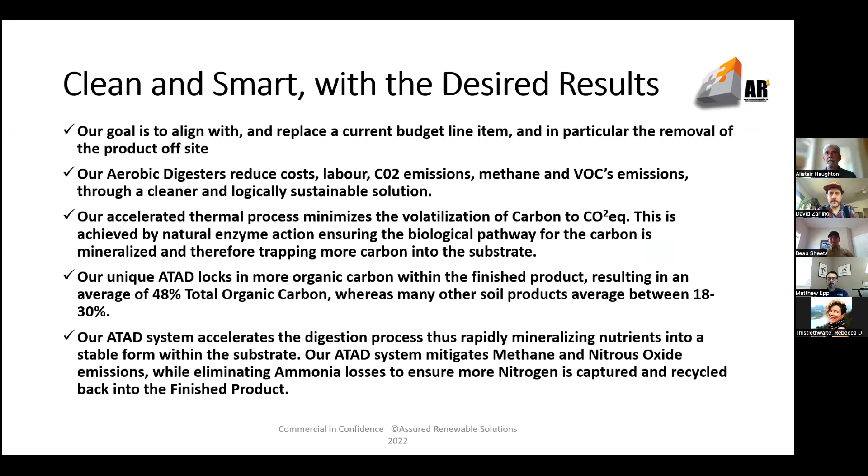It just, you load it and it's loaded through automatic source feed abilities. And then of course, you have this valuable product that comes out the end without you having to worry about groups having to come pick it up or take it to the landfill, etc. These are some of the advantages. Of course, it removes the issues when it comes to the pathogen load.

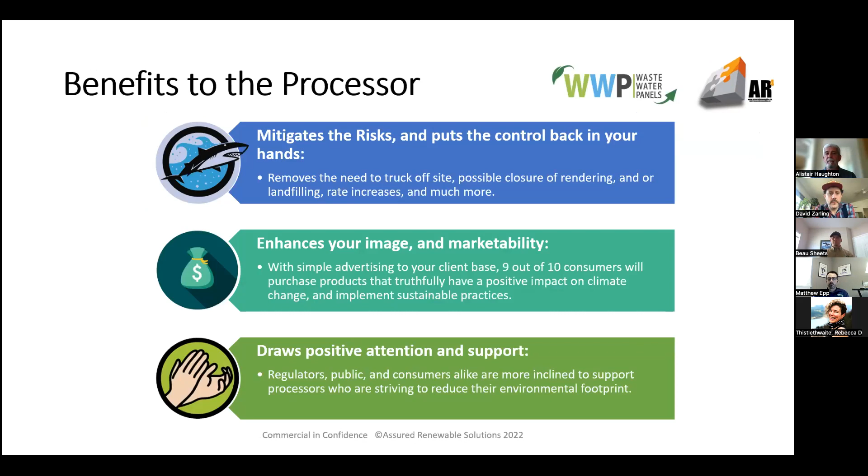One thing I will add there is that if interesting bugs are present, BSE or something of that nature, and it's detected, you at least have the ability then to segregate that waste stream from the balance of material, test it. You're able to hold it on site because it does not attract vermin or it won't rehydrate. So you're able to then test that material if, for instance, prions are present.

That material has been degraded and composted to the point where it actually will be accepted at landfill, because it's not going to cook off in a landfill and cause those other issues. And it can be safely disposed of.

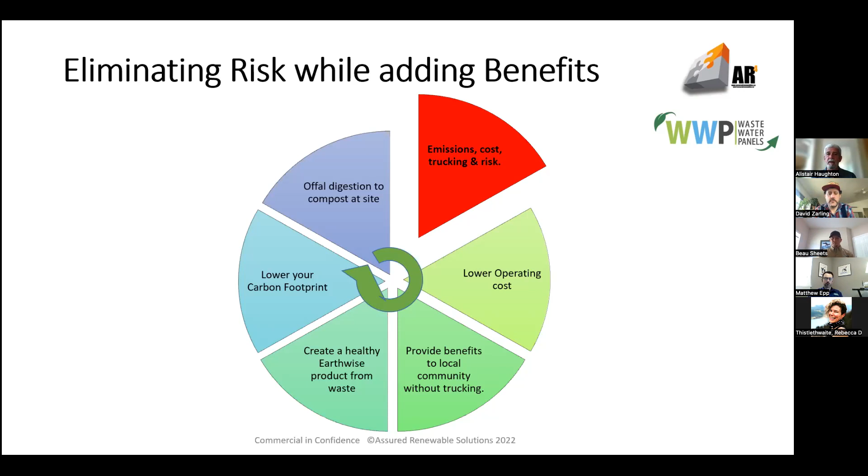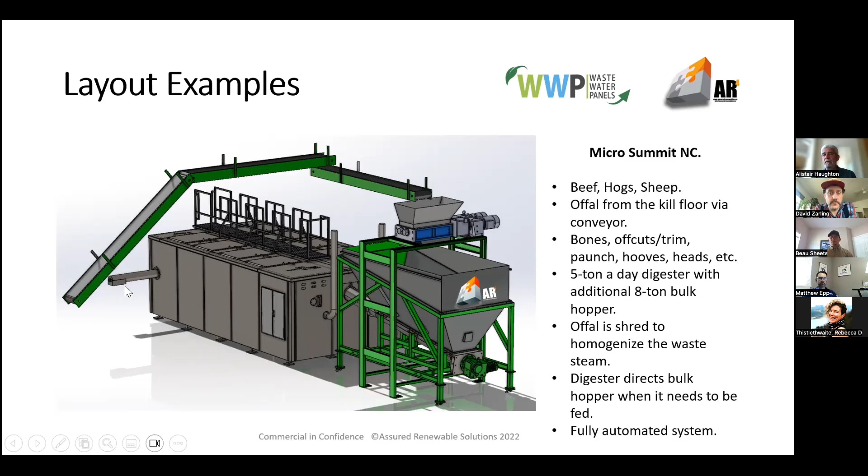Again, some frequently asked questions. This is going to be circulated, so you'll see it. This is another example, in Carolina, where it's an outflow system by conveyor from the plant. So offal right off the kill floor, straight up, straight into the shredder, into the hopper, out. And again, just showing you the ability to be able to design units and fit them into pretty tight spaces if necessary.

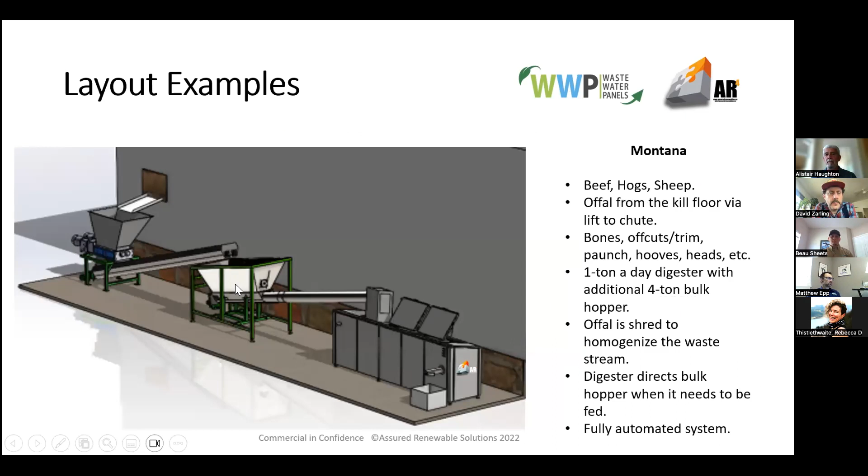This is another unit, in Montana. Again, straight off the kill floor, shredder, hopper, digester, output. Very straightforward. Just some of our clients.

So again, it comes down to a matter of being able to isolate the risk that is presented to the abattoirs themselves while increasing their productivity on the floor, because they're not having to put the labor into managing barrels. And if the guy doesn't decide to come pick the truck up one day, you're left with all that offal outside, everybody's upset, smells nasty. So this eliminates all of those issues while providing the upside benefits to both the abattoir itself and of course the community at large, and producing a high grade composted product that you can put to ground immediately.

We have the units in schools, as I mentioned before, military, abattoirs, hotels. The units are present in numerous applications outside of just offal and animal waste. And I'll leave it at that.

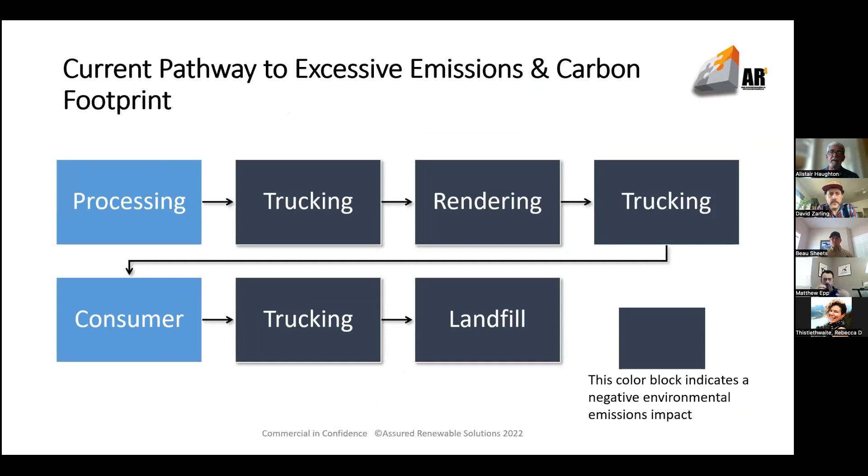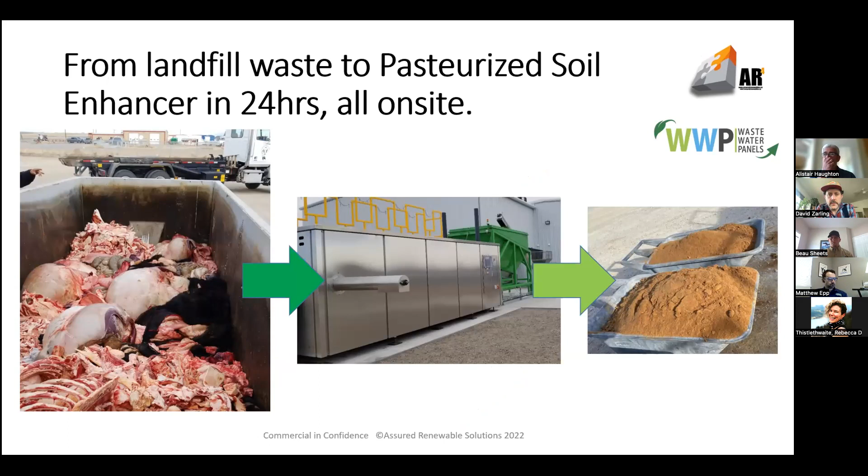So again, no additives. You don't have to pile enzymes in, you don't have to add a whole bunch of crazy things in there. One thing we do recommend, oddly enough, is rice hull pellets. We use those specifically to provide an additional boost to the output material, even though the output material is probably the best thing you can put to ground.

As a matter of fact, there's a number of studies, one done by the EPA and USDA in conjunction with two US universities, on the benefits of putting this material to ground. One study, done through the University of Minnesota, showed a 26% increase in wheat production. By adding a rice hull pellet, you're basically just adding silica, which is one of the most depleted products in the soil when you're farming, and of course silica is the baseline management system when it comes to growing plants.

Is this a batch or continuous process? It's continuous, you can add waste anytime. Can the finished product be used immediately? Yes. Maintenance-wise, again, very little is required, and we design it that way because, following the military pathway, you can't be sending guys in the field in the middle of bloody nowhere.

And we have systems as far away as Kwajalein in the Marshall Islands, all the way up to the north slope of Alaska, the highest points in the Yukon, Chile, Iceland - they're everywhere.

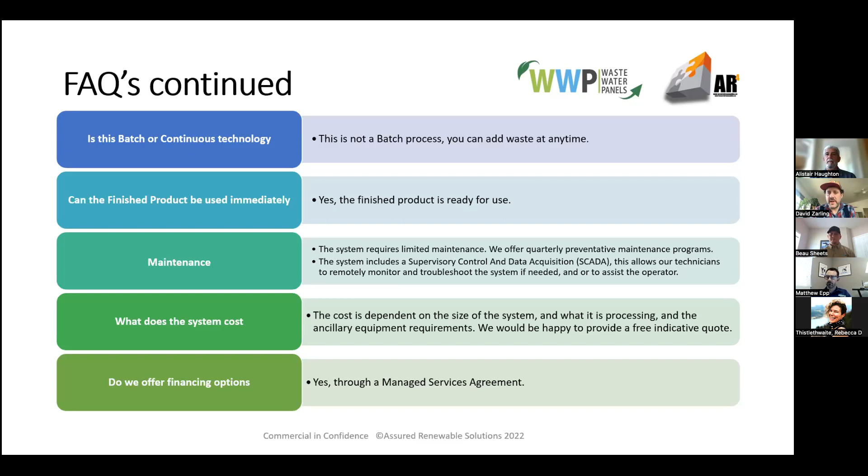This is a fantastic opportunity to talk about composting, because anybody in the composting industry knows that at parties we're not the popular ones. As soon as people ask what you do for a living and you start talking about composting and dead animal parts, they usually move on to the next person. Actually, it's how I knew my oldest daughter was dating some guy—we were at the school and he started talking to me about composting. It took me 60 seconds to realize something was funny there, and sure enough, they were interested in each other. We'll leave it at that.

So what I'm going to do today is talk about how composting works from a basic level, and then work that into our systems. I appreciated Alistair's presentation—he included a lot of really good base information, so I'm going to jump off of that.

So what is composting, and what is Ecodrum, and how does it work? Composting in its natural form is a natural biological breakdown of organic materials into stabilized nutrients. You're taking something that will essentially rot, and stabilizing those nutrients into soil enhancers that can be used for plant growth and food production.

All right, so this is what I was referring to. I'm throwing some real pictures up of some compost sites. So we kind of went through some of the basic elements of composting. I'm just going to reference the pictures here.

Alistair did a great job referencing the heat that the microbes produce, and you'll see some of the steam. Obviously we don't leave it open like this, but this is just when you open the loading door. These are some shots inside of loading doors and discharged compost, and the heat that's being given off. The microbes themselves put off a great amount of heat, the thermophilic activity that creates the temperatures.

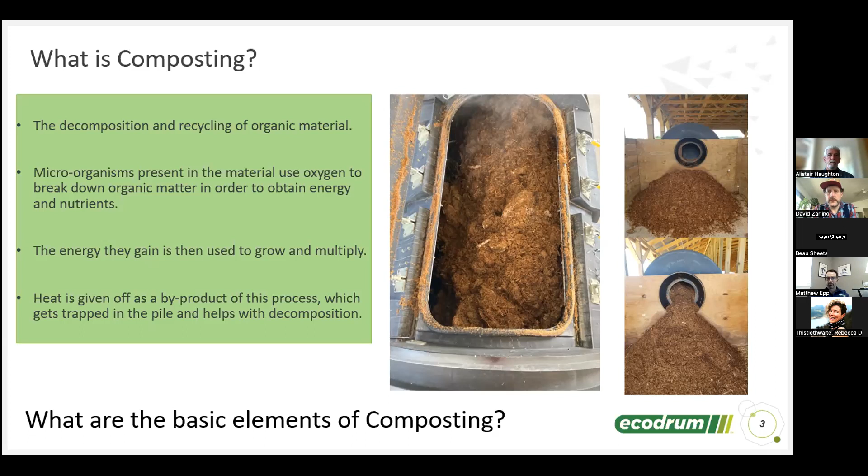So when we accelerate that process through forcing air into it and making sure the process is mixed correctly, you get those temperatures that create the pathogen-free compost product, per the EPA biosolid protocols.

So this is just the C:N ratios and the moisture and the oxygen that we referred to - feeding the microorganisms. In order for the composting process to occur, we need to create a suitable environment for the microorganisms to live and grow. So in addition to the nitrogen source, which is of course all the dead animal parts, the offal and the inedibles, correct carbon materials need to be present.

Alistair was referring to rice husks, which are a great option. We use everything from wood shavings, dried wood shavings, to peanut shells, to ground up corn cobs - any dry carbon source. In a site analysis, a discovery visit, we'll discuss what's available in your area for maximum ease and efficiency in your system.

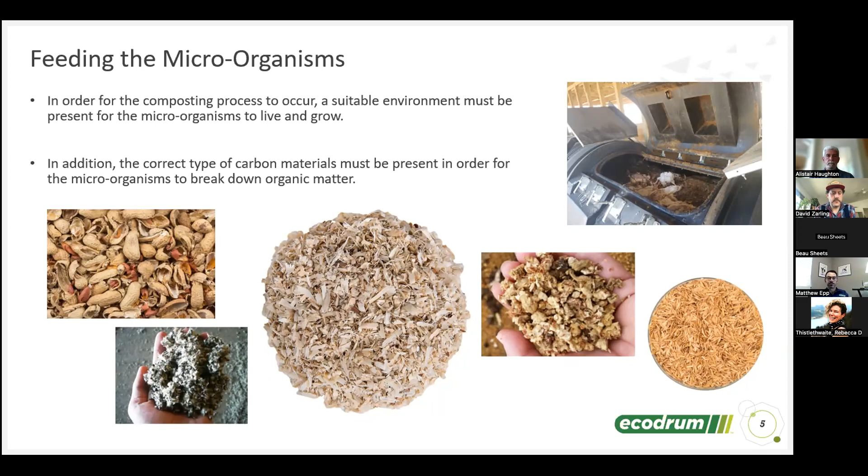I don't need to peel through this entire slide, but I noticed in the questionnaire that David put up that several of you do static pile composting. So this is just a little bit of a comparison slide between in-vessel composting versus static pile composting.

So we too are a continual feed system. You'll see in the pictures coming up, as the Ecodrum rotates, it moves the compost as it's doing its thing along inside the drum, creating space for new materials to be added in the loading door. So it's not a pile where once the pile is made, you need to maintain the pile without really adding anything else to it until completion.

So again, when you're in-vessel, this is not going to attract scavengers like your rats or your bears or eagles or whatever's in your area, which would be opposed to a static pile. It's contained, it's biosecure. The system itself is automated, so it turns everything automatically, it aerates everything automatically. And the material is broken down typically in a matter of days, but we'll say up to two weeks, just to be on the safe side.

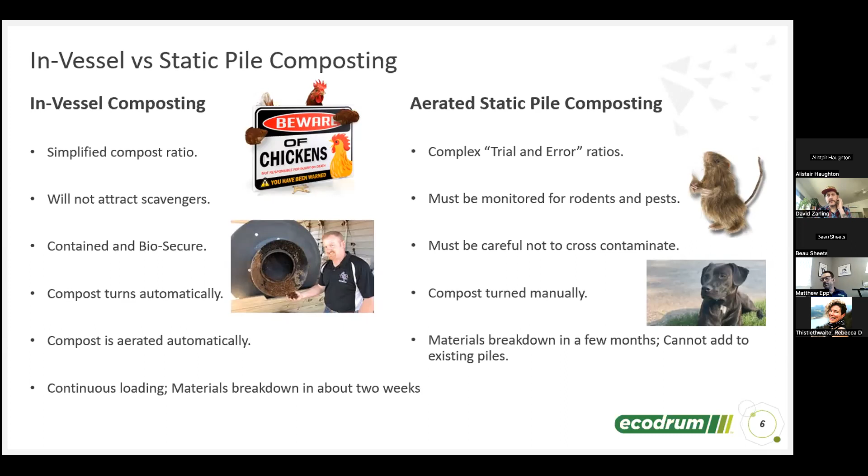So that's opposed to static pile. If anybody's ever done static pile composting, it's a little bit of a trial and error ratio. You don't really know until you flip it. You have to kind of temperature probe it all the time. There's a lot of work that goes into that - it's what we call a trial and error process. Material also in static piles takes significantly longer to break down.

So when it comes to meat processing facilities, there's several things we need to consider: how many animals are being processed, the location of the site, and the sensitivity to odor control. Now a lot of it is just public perception of odor control - how close you are to your neighbors, kind of a thing.

An example of this is we have one site up in Northwest Washington State where there was a government official who lived next door, so a lot of caution was taken by the facility to ensure correct odor control. And subsequently, the government guy really likes us because there's no smell. But the public often has a perception, as soon as they say composting, of bad odors. So we just have to be sensitive in talking about it to the local community.

Also in consideration is what's the end goal - is this something where you want to create a secondary business where you're selling compost to the general public, or simply for your own land application to grow crops? Often it ends up being for land application. You'll end up with the best crops in the area and people will ask you why, and then you don't tell them, keep it secret.

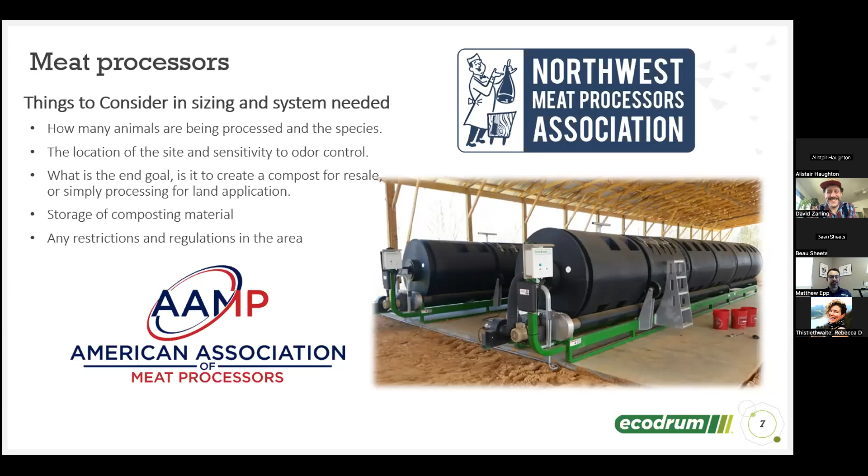So this is a really wordy slide - I would ask you to look at the right-hand side. This is kind of a typical compost site. There's several pieces in here, and similar to Alistair and Beau, we'll come and do an assessment. We'll see what kind of designs we can do, but this is just for illustrative purposes.

So some of the options - of course, the core of every compost site is our composters themselves. Then options include a mixer for pre-processing, and I'll show some pictures of this coming up.

The mixer provides storage for your dead stock, so you don't need to use your refrigeration in the interim. It just comes out of your shop, goes straight into the mixer. It's also a place where you can meter the loading of the system, creating a very simple daily operating procedure that minimizes the man hours that need to go into waste considerations.

Another option is conveyor loading and discharge removal systems, so it's truly a hands-off system. We have a bone crusher so you can crush up the larger bones and skulls. Beef skulls present a growing issue in the industry, not quite like hides, but it's nice to have a bone crusher. It crushes them up and adds them to the compost, adding good nutrient value if you're on the selling or using side.

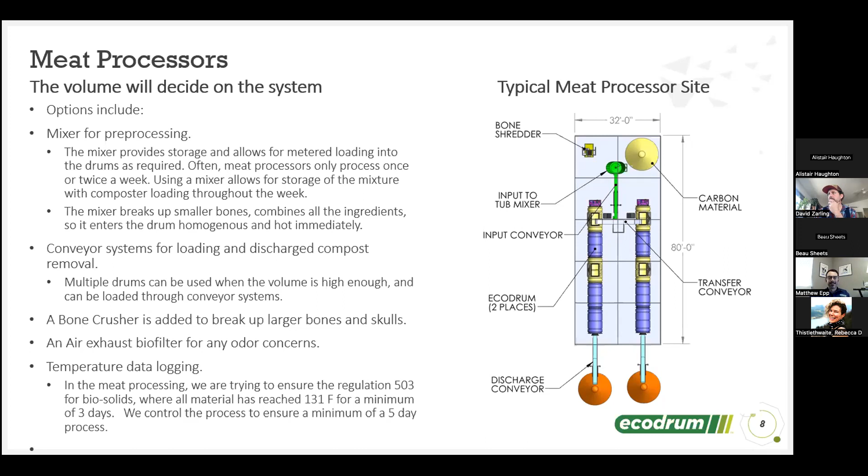For odor control issues or public perceptions, we have an air exhaust biofilter that we can put on the forced air system, so it's truly an odorless process. We also have temperature data logging. Typically the younger crowd likes sitting at home on the couch looking at your phone to see what the temperatures are. It kind of depends what you like to do.

So that will pre-mix it, and then what we call in the composting industry, your mix goes into the composter hot. When you pre-mix it like this, you actually start gaining thermophilic activity within a couple hours. And when you put it into an aerated vessel already mixed like this, you get instant high temperatures, and it really accelerates your throughput.

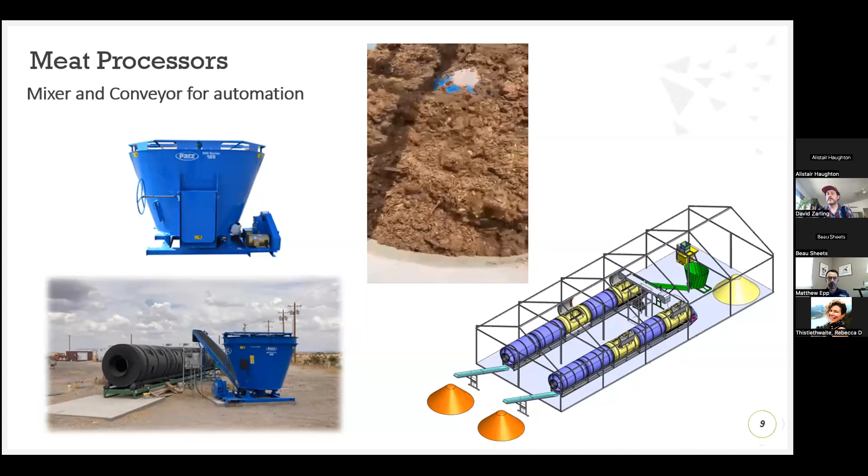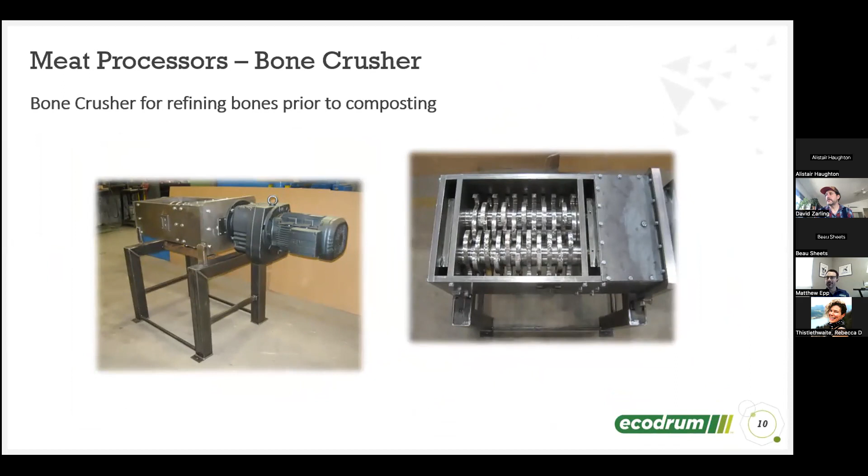So it's just some pictures of the bone crushers. I'd say quite evidently these are pictures of new bone crushers because they don't quite look like this once you start using them, but it's a pretty robust piece of equipment. The video on the right - normally you wouldn't put them in one at a time, you'd have your hopper on top and just fill it, and at the end of the day, or whenever you're crushing bones, you turn it on.

So we actually dialed it down. The bone crushers have a clutch system on them, so if they do get jammed, or let's say some wood falls in there, it's not going to eat itself - it will sense too much back pressure and back off.

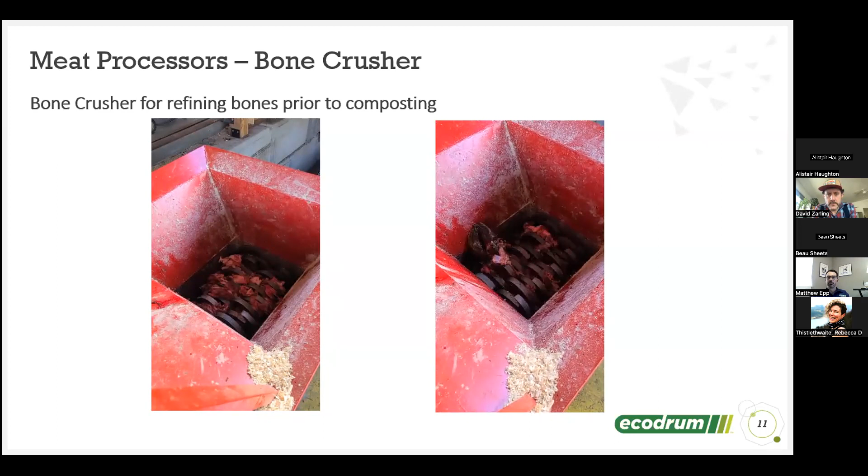This is just a quick one - I can't actually see on my screen. There we go, so there's just some hooves and stuff going through. Same thing, we just have the clutch to demonstrate.

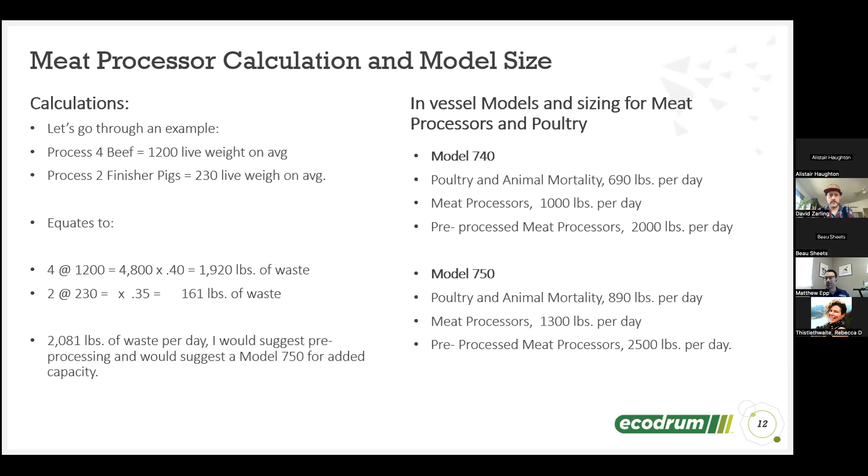Then we design a compost site with your input. We strive to make a relationship with our clients - we don't want to come in and tell you how to run your shop. We want to learn about you and your shop, and then how we can fit into your process. Often in that process there are discoveries as to neighbors who could use this as well, so we like to work in that relationship mindset model.

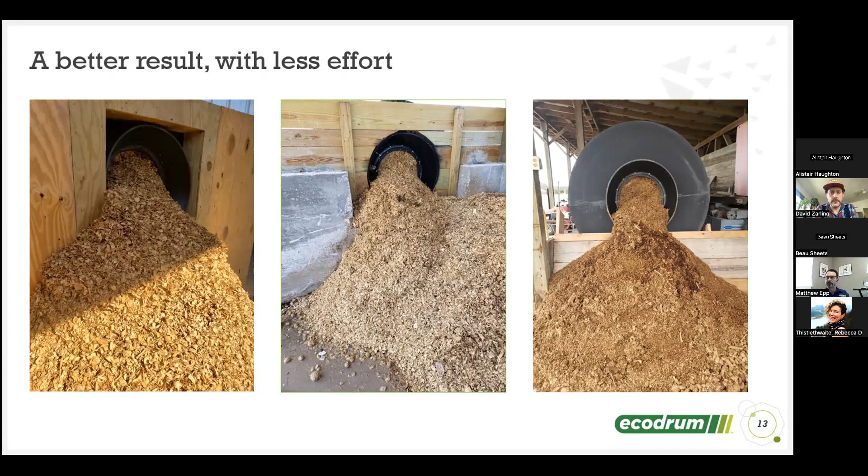Here's just a couple pictures of the discharge bays. These obviously don't have the conveyors for the removal process, but these make for better pictures. As you can see, this is material straight out of the composter - a few days prior, this one is corn cobs and these two are wood shavings. Alistair referred to the 70% reduction in volume - in the composting process itself in vessel, we'll see about a 30% reduction in volume, then in a subsequent pile it'll continue to break down until we've achieved similar volume reductions.

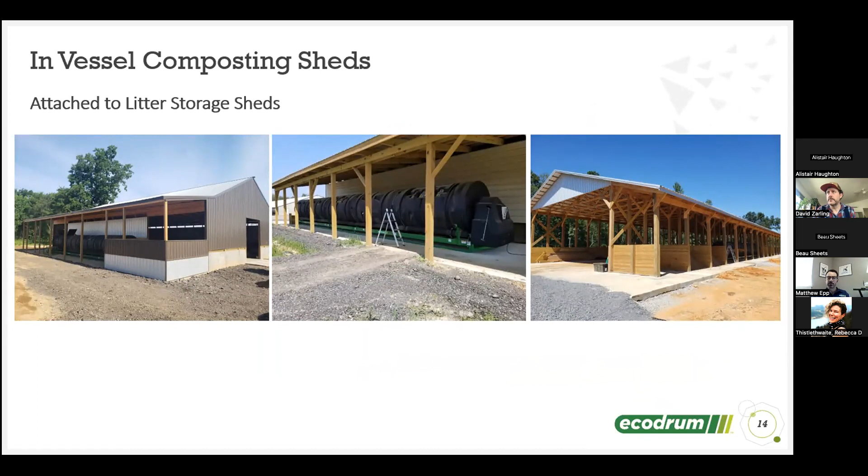So here's some basic pictures of some sheds, just some examples as to what it can look like. This is the larger shed design - the shop is on the other side of the wall. And here, this is actually a barn facility, so this would be a live production site. Just some similar pictures.

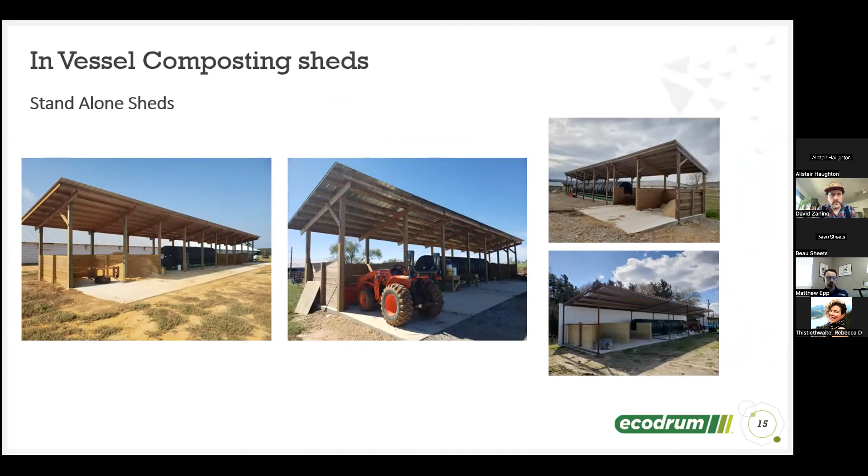So some of the aspects about our company - our international headquarters is in Ozark, Arkansas. That's our main production facility for the Ecodrum. You're all welcome, if anybody's curious, you can come do a tour of the shop.

We've got some research projects at the University of Arkansas, and we've got customers in the area, so we can do a little tour. Our maintenance staff is out of there, and the majority of our maintenance is done from a distance. If it's a small issue, we'll mail you the parts and video you through it, so it's a quicker fix. If it's something that requires on-site work, we have local repair, or mobile mechanics, that'll come out and do those repairs quickly and efficiently.

Included with every purchase is user training. We're not going to leave you alone until you tell us you're happy and understanding your system. If you need a refresher, we've got online videos, basic ones, mostly on YouTube - we're pretty open that way. That'll run you through the basics. We also have online chat help or phoning.

Everybody in our company is compost certified, through university facilities and extension faculties. So we have a silo of knowledge around composting dead animal parts. You can call pretty much anybody in our company and get some answers if you just call the main lines. We really strive to help you understand, not just flip the on switch.

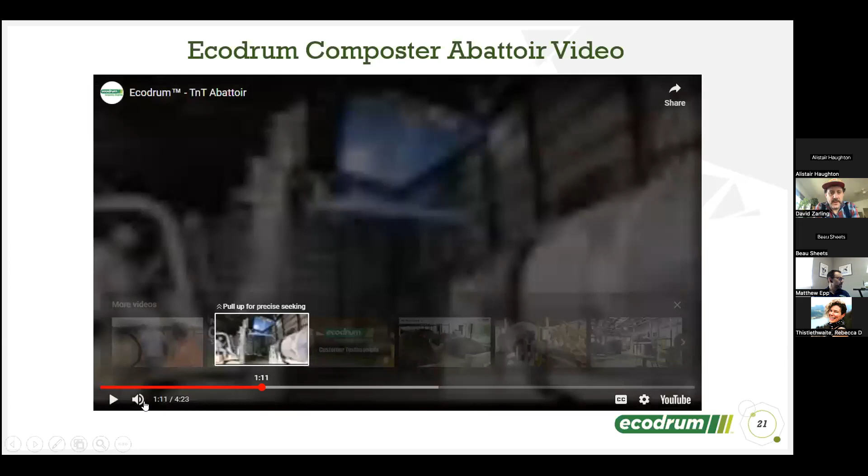Hang on a second, starting halfway through here, not sure why. Sorry, something's going wrong here. Not sure why it's starting out. Hang on, let me try on my screen. There we go. Yeah, it doesn't seem to be any audio.

No, hey, I'm getting audio on my end. Well, for y'all out there, if you're interested, YouTube search Ecodrum Abattoir, and this is free access on YouTube for anybody that wants to watch it.